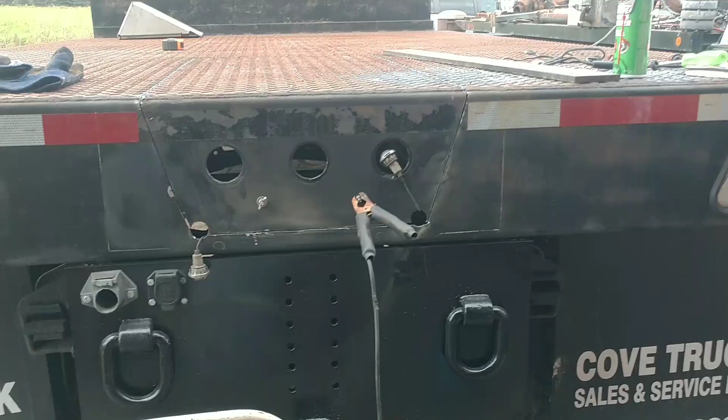Today I'm working on the gooseneck hitch. I've been working on this layout where I want it, and again we keep talking about lower, lower, lower. I've got to get everything as low as I can because this truck sits so high.

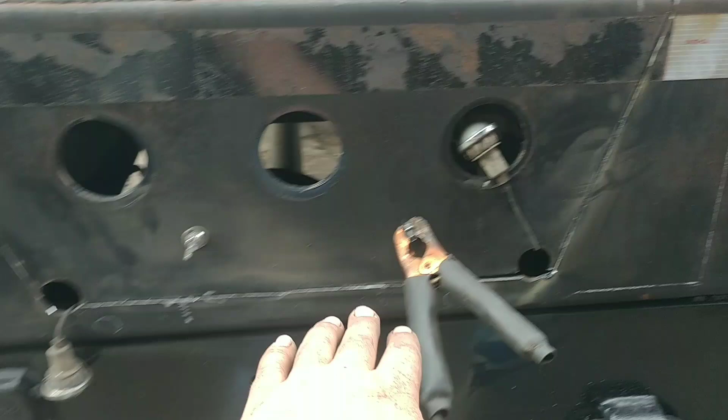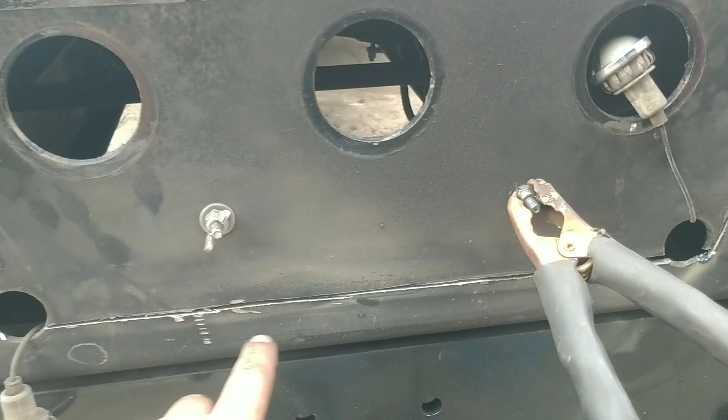So I've got this cut out here to where I can have my gooseneck plate. I need my gooseneck plate down here and still leave enough room for 3/4 inch LEDs here, here, and here.

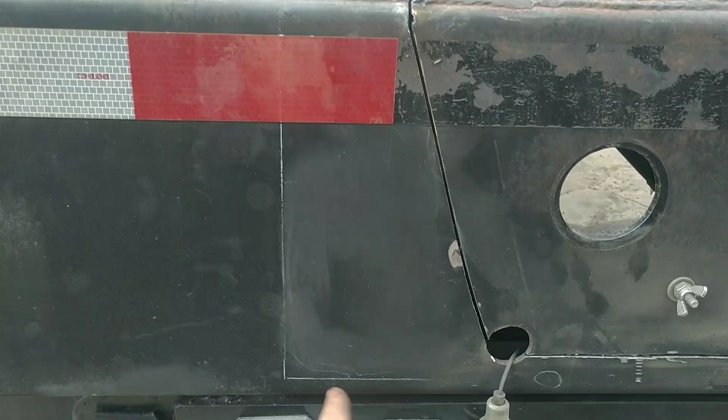I had to find a way to make this structurally sound, so once I cut the center section out and cut all these cross members out, I don't lose all structural integrity and the bed starts flopping like this. I think what I've decided is my C-channel for the bed ends right here, so what we're going to do is run it out to here, then plate it on the back side, and bring it down to what's going to be my gooseneck plate down here, so that I can tie this to that gooseneck plate. It'll pull down on this and up on the gooseneck when there's a load.

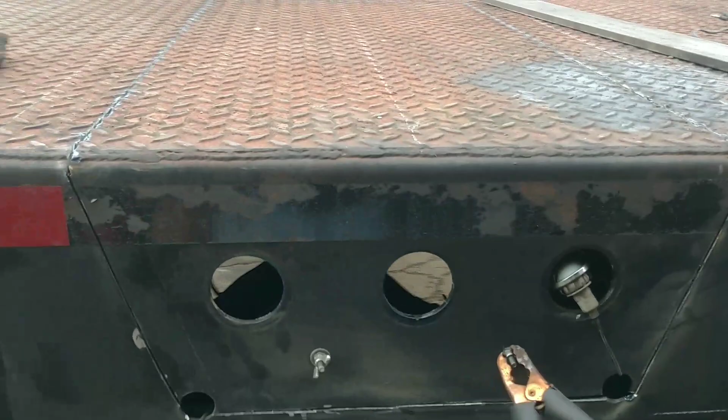There'll be more about that later, but here's the gist of it. I cut it on an angle. I was going to cut it out real wide and square, but I wanted to cut this out because I'm not going to use this stuff. So this layout worked out the best. I'm going to have the gooseneck ball about 1 inch ahead of the center of the axle.

I need to figure out this bulkhead. I've decided it's coming off completely. It's not wide enough, I want it wider. I want it to meet the width of the bed, and I don't want it taller than the cab, and I don't like where it breaks off. I want it to come up about the bottom of that window and then taper in to where the corner of the cab is. I guess theoretically I could reuse what's here, but I think it's going to be more work to make that stuff work than it will be to just redo it.

We'll just hang onto that for something else possibly. It's on here pretty decent. It's welded in here. It's welded right here. It's stitch welded here and here.

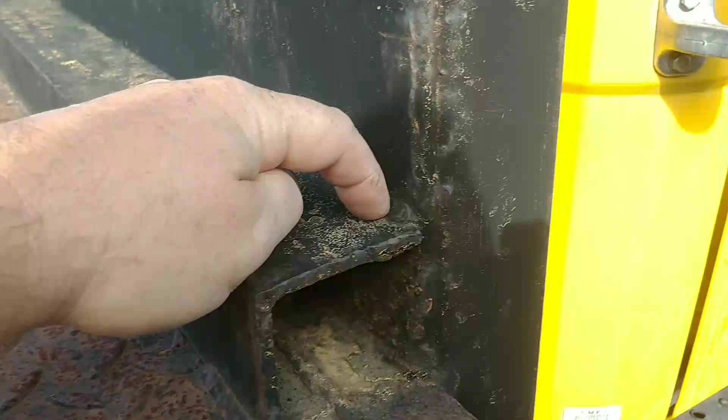This was to stop it from doing this, but it could have been done better here just by coming down the side of that channel and welding the side. That would have been stronger. Look, that weld's cracked right there. See that? Right there, that weld's cracked.

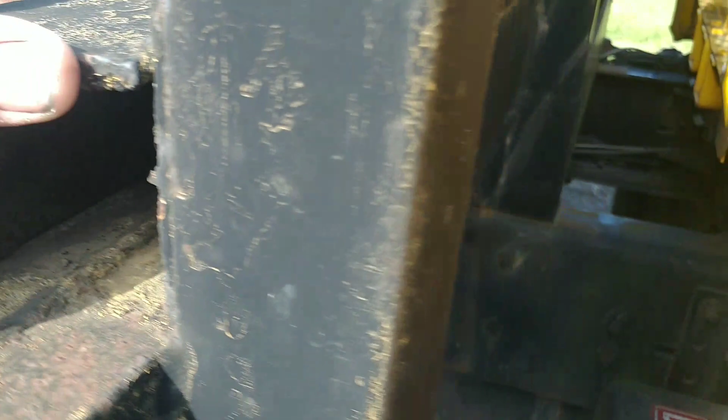So this was probably an afterthought. Well, it doesn't look like it though, because that was put in here like this. So maybe it was an afterthought. Regardless, it doesn't work for us.

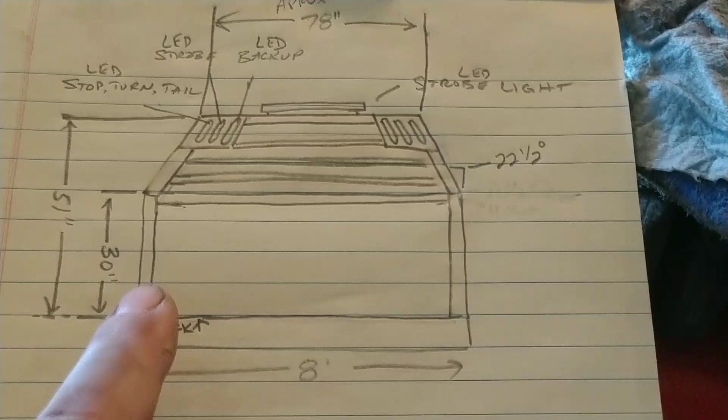Alright, so this is basically what I had in mind for the bulkhead. This is the deck, it's 8 foot wide. So here's the top of the deck. We're going to use as much of that existing material as we can. Of course I've got to cut it all apart, which is okay because a large majority of this is going to be covered anyways. Alright, so we're going to stay 8 foot wide.

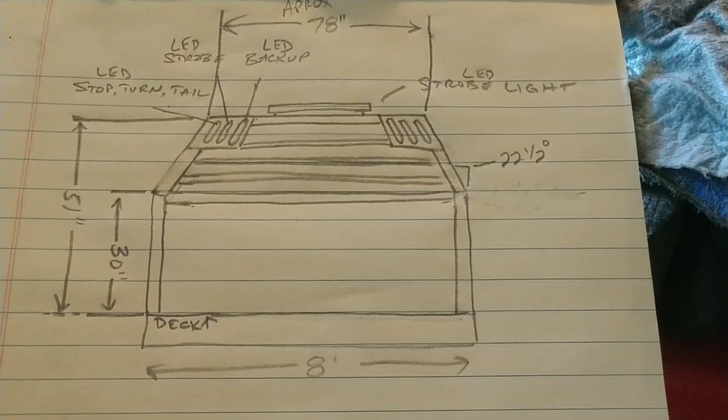That way a sheet of diamond plate steel will be wide enough. We'll just cut off a little bit so we can come in slightly from this edge so that we can weld flat here instead of welding on two edges. So we're going to come up 30 inches. The bottom of my window is 31, so I want to come just slightly below that window, just barely. So we're going to come up.

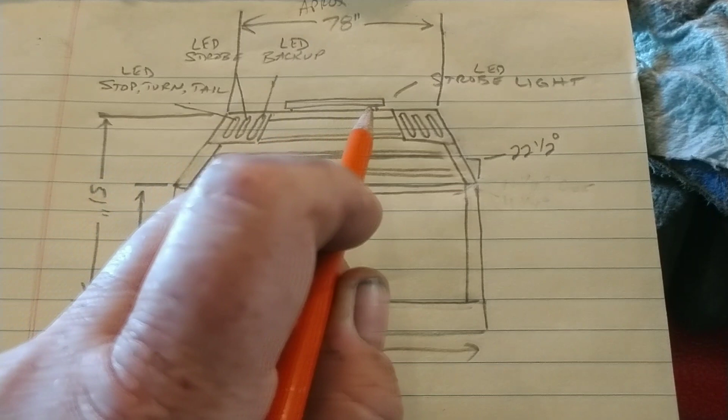This is going to be a 22-degree angle right here, and then we're going to run one end. This is going to be 2x2 box, or 2.5 by 2.5, which is what that already is. This will be 2.5 by 2.5 all the way across here and back down. This will be whatever I have left. Now behind this there'll be 2 runners that come here that tie into the main channel.

I think that's a good place to start. So the next thing is I need to get the bed off the truck.

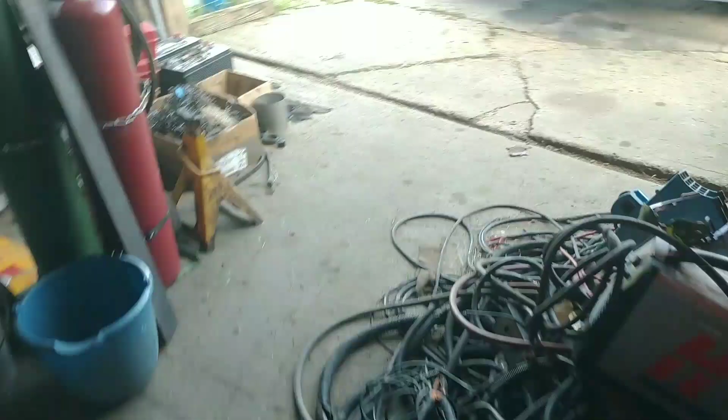He's going to lift the bed off, so he can cut out the gooseneck part that he's going to cut out. It looks like everything's unhooked. Go ahead.

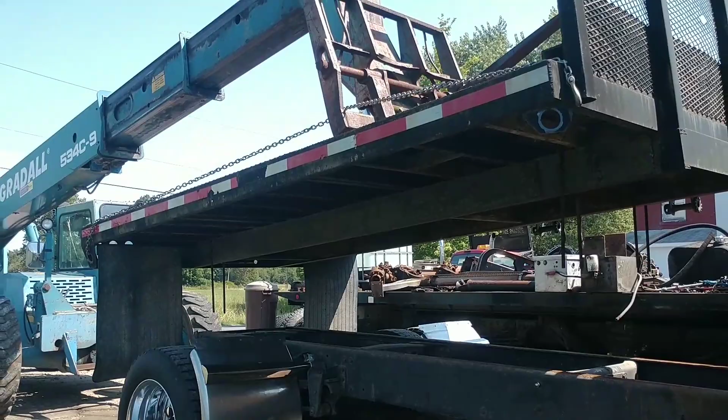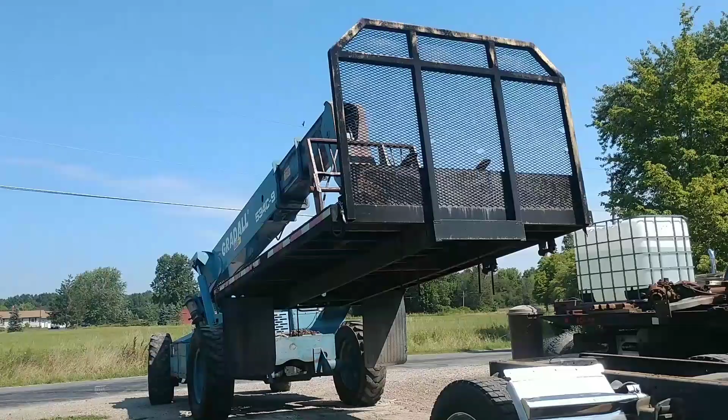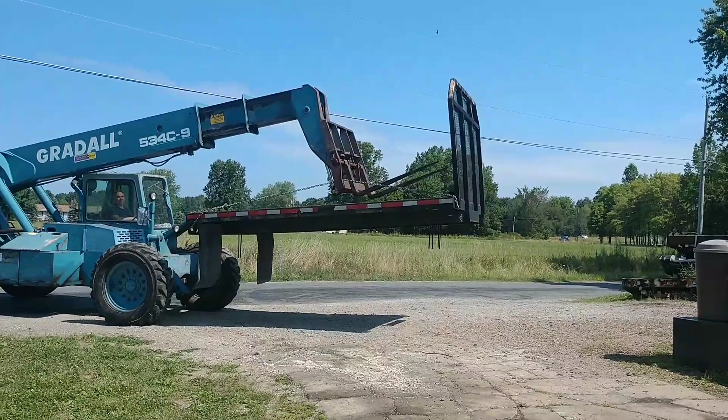He's going to take the bulkhead off too because he doesn't like it. He wants to put a different one on. He's just moving it over to the side, and then he wants to move the truck out of the way and put the bed back over here where the truck's at so he can work on it. I think that's his plan anyway.

Say hi. Huh? Say hi. Hi. Say hi, lady. Hi, lady.

Never fails, when you go to back out there's always traffic. There could be none for a long time, and then everybody has to go by when you're trying to back out. It's aggravating.

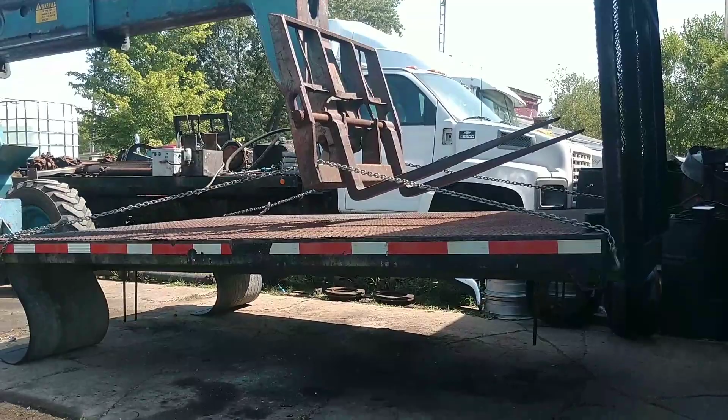Put them up in the shade, you know? Yeah, a little bit. You mean the U-bolts? What are you talking about? Oh, okay.

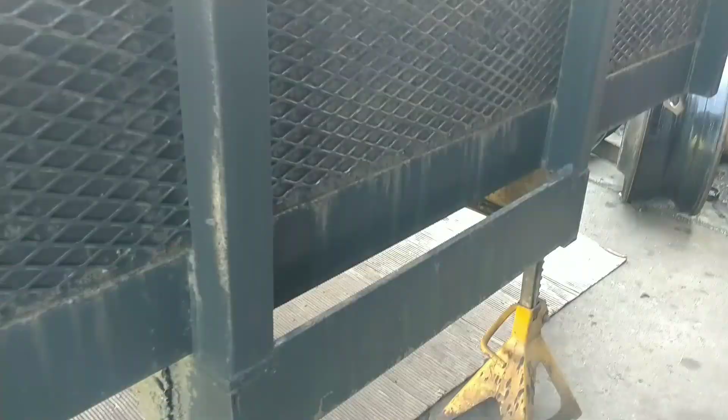Now that the bed is off the truck, you can see here there's another crack right there. There was just too much up ahead of this and not enough support down here. I mean, I give them an A for effort, like they tried, but it's just not going to work for us.

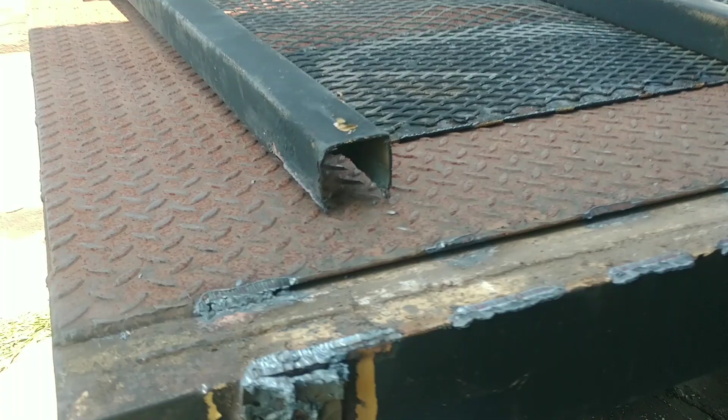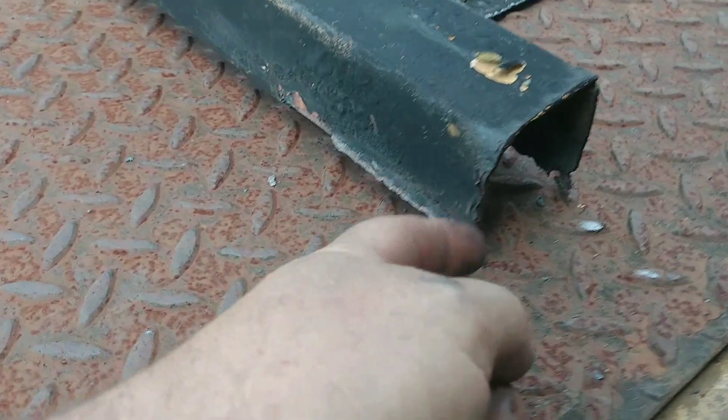Okay, so it came off pretty easy. You know, it left some schmegma over here I'll have to get off, but I think that was the easiest way rather than gouging into the metal I was saving. This already had a couple cracks in it, and I figured it'd be easier to just cut it that way and then start to disassemble.

What else was I going to show you? Yeah, you can see this one was cracked over here pretty good. Part of me wants to just throw that off to the side and build new, because I think I'd build it out of something a little bit heavier than this too. I don't know. But it's off.

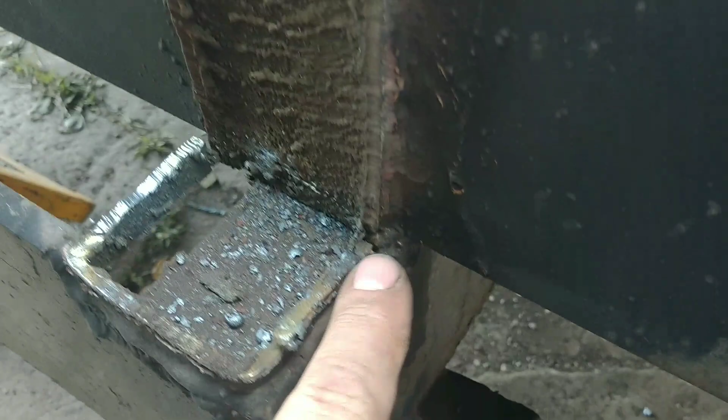So now what I'm going to do while I'm deciding what to do with this, I'm going to lift this off, set it over. Well, I'm going to clean all this up first, get all this old crap off, and get it cleaned up the way I want it. Get this stuff out of here, like this. Get all this out, because when we do it, we're coming up this side. So I want to be able to weld here, weld here real good.

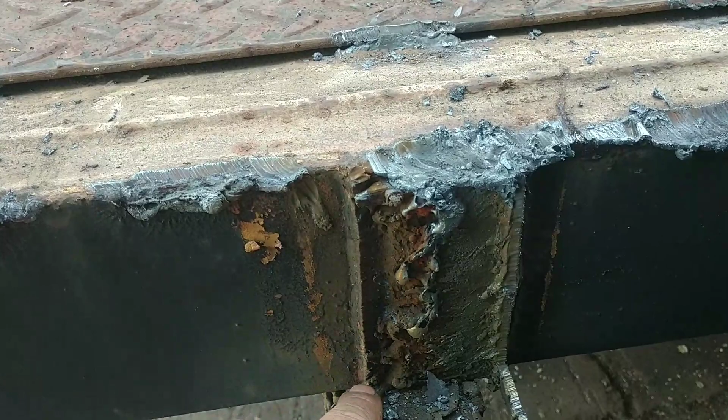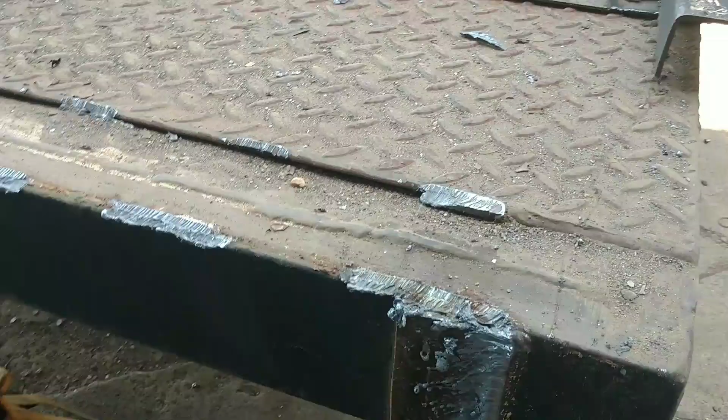So I suppose this doesn't have to be super clean, because we're just going to weld right in here. But anyways, we can do better, we can get it as clean as we can. So my poor compressor's working its butt off again, because this plasma cutter uses a lot of air. But everything's coming apart fairly decent. I just want to get this cleaned up so I can flip it over and work on the gooseneck.

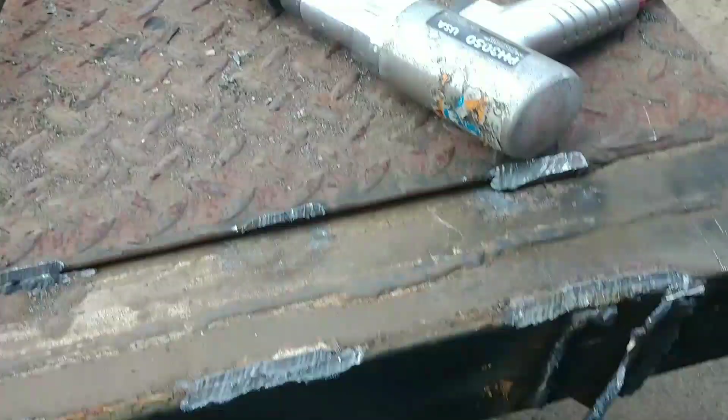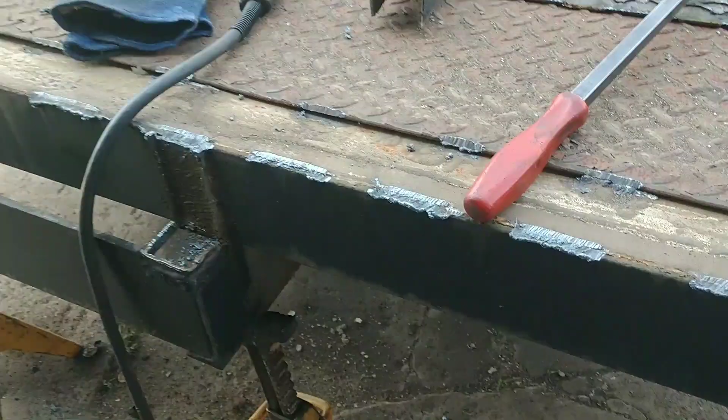Well, I was working on getting these off, cleaning this up, and the compressor started making this really high-pitched noise, like man, it's really pumping good. Yeah, the only problem is it's pumping air out the intake, not into compress. So I am without a compressor. We're dead in the water now. I'm going to have to go buy a compressor.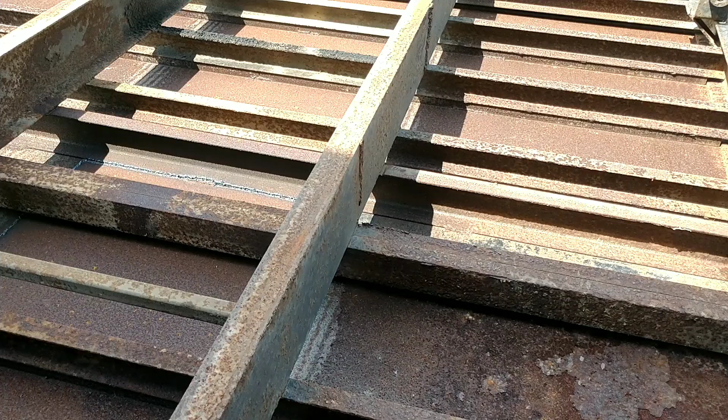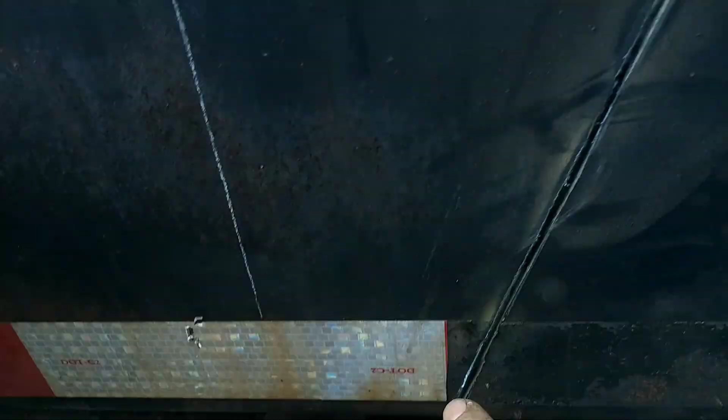Alright, so we're flipped over. Now you can kind of see what more I was talking about, bringing these out past. We're going to cut these on an angle to match this, I think. We're going to try, I might just take a die grinder. And it looks like they're just welded on one side.

One little weld here, and a little weld here, a little weld there. So I think I'm going to go ahead and take the angle grinder and cut them out. That way that whole piece can fall out. So I'll do that now.

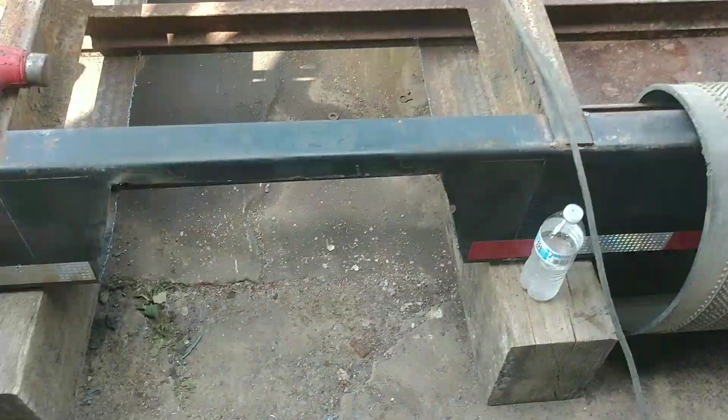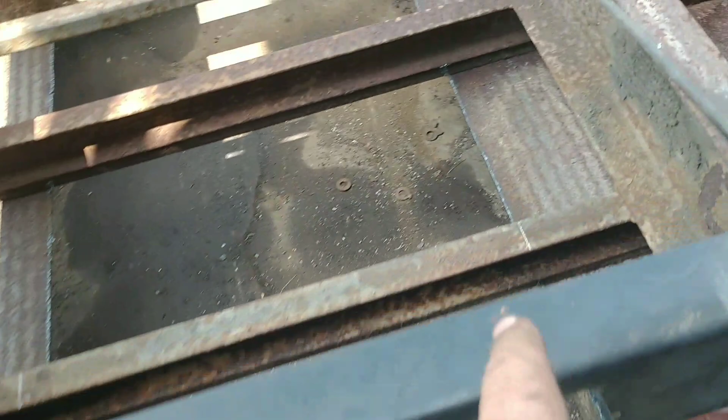So there's the piece we cut out. We just had a few small welds, nothing big, holding it together. So now I need to transfer this angle onto these cross members, because I really want to cut this on an angle so I have something to weld the plate to when I bring it across here. Because we're going to take that plate we just cut out and lay it back in here to finish this out. So I want this to be on an angle so we can just weld right to the bottom of it.

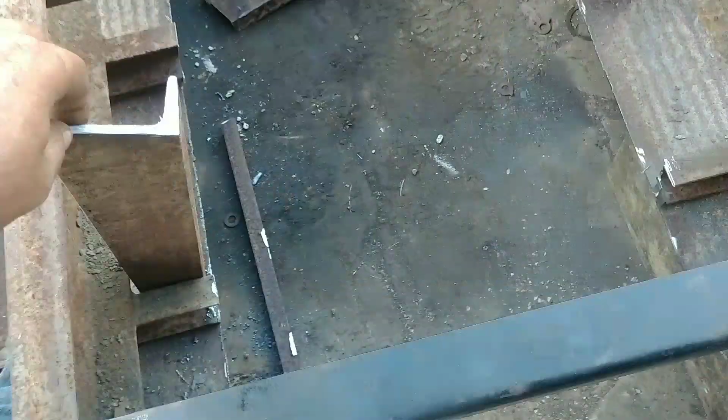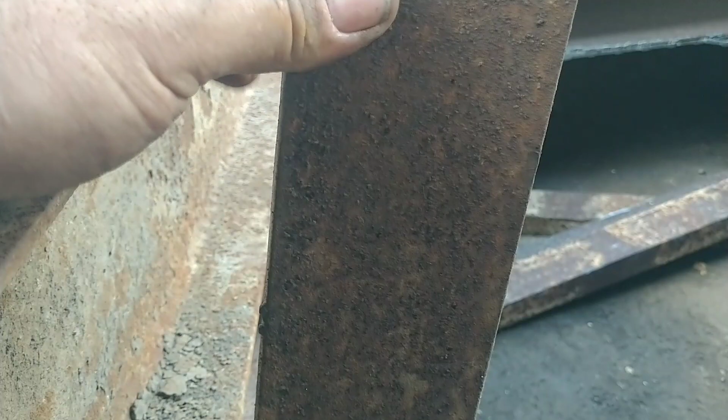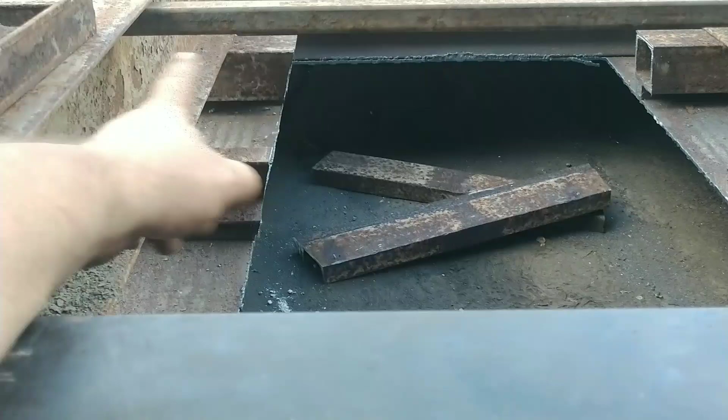So here's what I was talking about. We're going to take these pieces of channel, and don't forget this is upside down. So now this will come down and hit the gooseneck plate. So we'll cut these off at the right angle and weld them to the gooseneck plate. That'll stiffen it up, because that gooseneck plate is going to span 32 inches in this opening. So by doing this, we're going to be bringing this in quite a bit.

Let's see if you can see what that's going to be. I don't know what the width's actually going to be - I had measured it, I just don't remember right now, but you can see how much it's going to narrow that up and strengthen it. It is what it is.

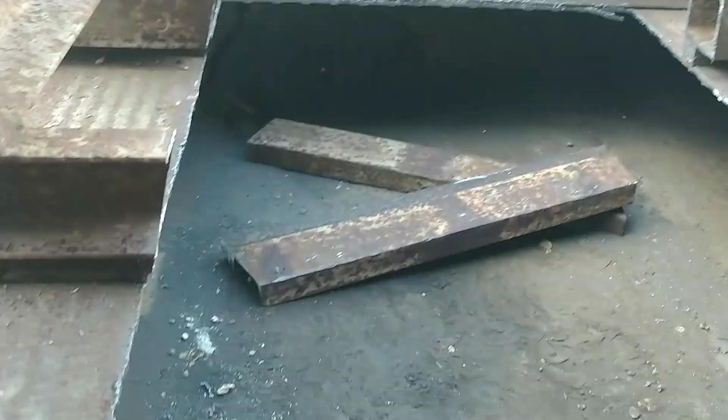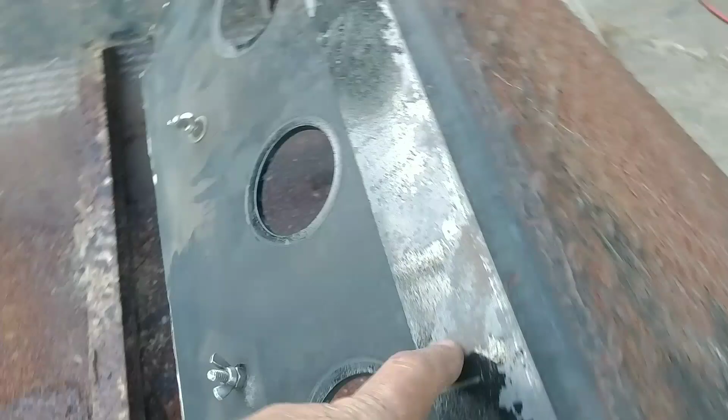So this is where I'm stopping for now. It's all cut out. So tomorrow I'm going to go ahead and order my 1/2-inch plate, and this will make the sides. I could probably use this in the well, and I don't know, I could put lights in here. I could use them for hooking up, I guess, at night or something.

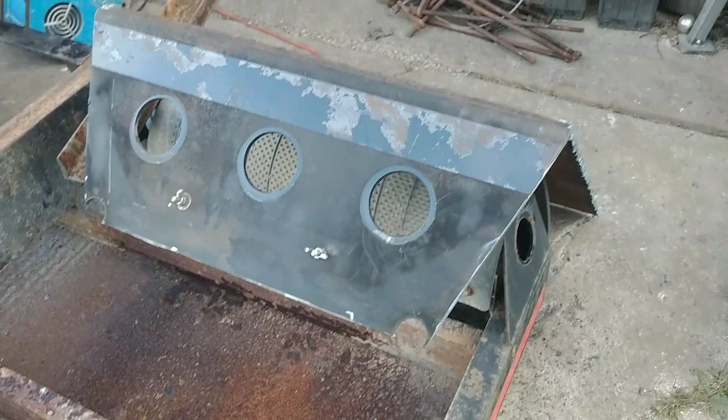I'm going to order up my plate. I'm getting 1/2-inch plate, and with the gussets we're putting in, I think 1/2-inch plate's going to be more than adequate. Alright, that's it for now. We'll bring you back once we've got some steel.